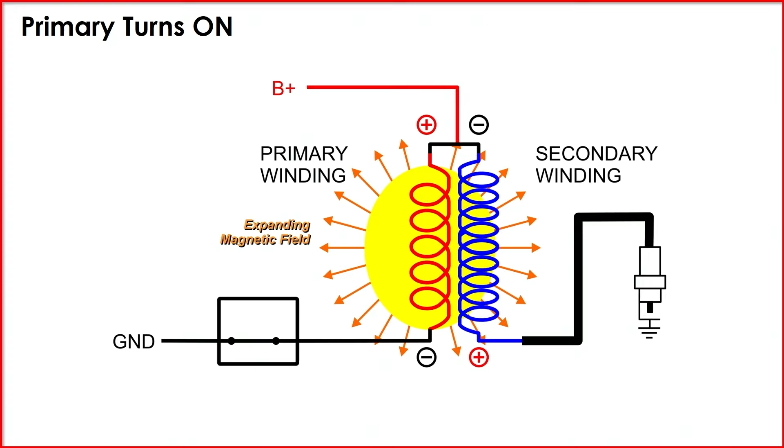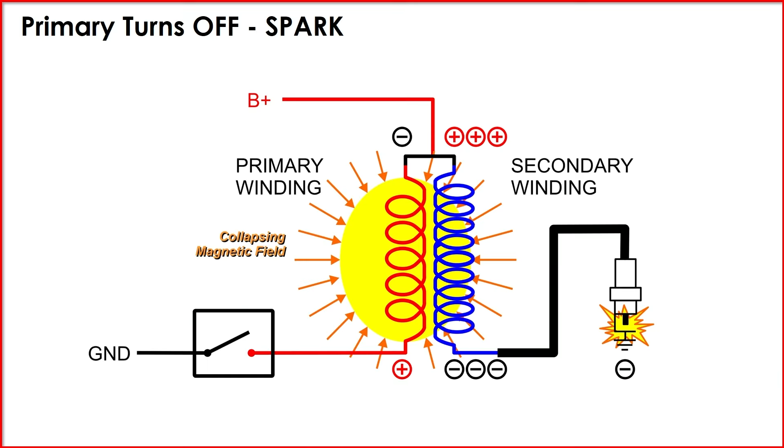First thing we're going to do is a quick review on how the ignition coil works. But whether it's a 3-wire, 2-wire, or 4-wire coil, we still have to end up at this place, where we take the primary winding, energize it with power and ground, turn it off, and then collapse that primary into the secondary and get spark to the spark plug itself. And then we repeat that cycle.

In order for the ignition event to occur correctly, there are some basic timing controls being done in crank mode to get the car started. As you can see, the big ones here are RPM and cam position, but you also see that we have labeled the MAP sensor as an input. We all know that some cars don't have MAP sensors.

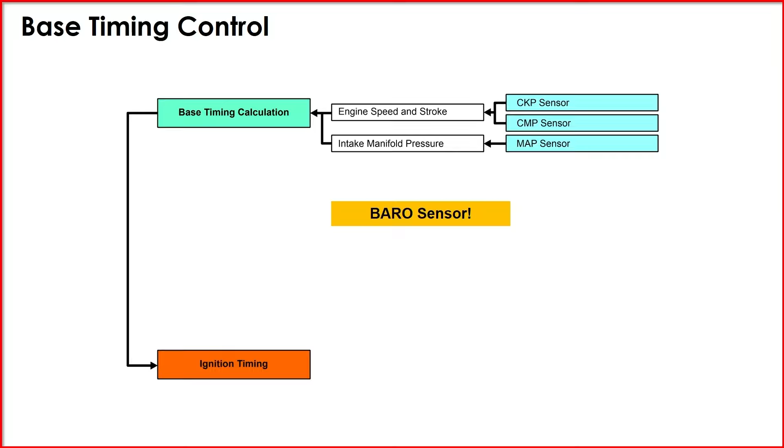This is why I've put our first power tip in there: the BARO sensor. The BARO sensor is going to be a primary input into the module that's controlling spark timing on the vehicle's engine control, and that's why I've highlighted it here—the importance of the BARO sensor. If the BARO sensor is out of calibration, it will affect ignition timing on this vehicle, or can cause erratic spark.

Once the car is running, a bunch of other inputs are going to come into place. That's when the module is going to provide additional control of the timing and move away from a basic ignition timing to an enhanced ignition timing control. That's where it has the ability to retard or advance the timing based on the conditions you see up on the screen here.

An example would be intake air, coolant temp, atmospheric pressure correction, and knock control. That's a reminder—that could also be a power tip—that we have to pay close attention to see if there's any knock correction occurring on the vehicle.

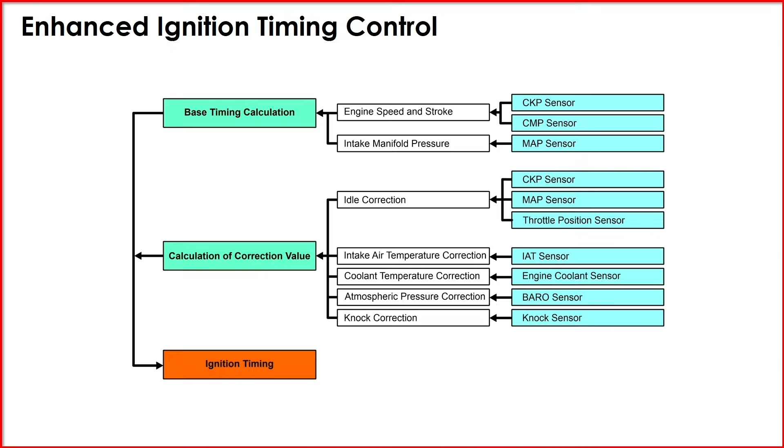And then eventually we end up at whatever desired timing the module wants it to be at. What it comes down to is they're trying to create maximum pressure, which equates to maximum power at the correct time. This is why the timing is controlled before or after top dead center, depending on the application. Most of the time we're going to be before top dead center, but the idea here is to create the maximum pressure 10 to 30 degrees after top dead center, when the piston has already started coming down, to create spark and generate that maximum pressure for maximum power.

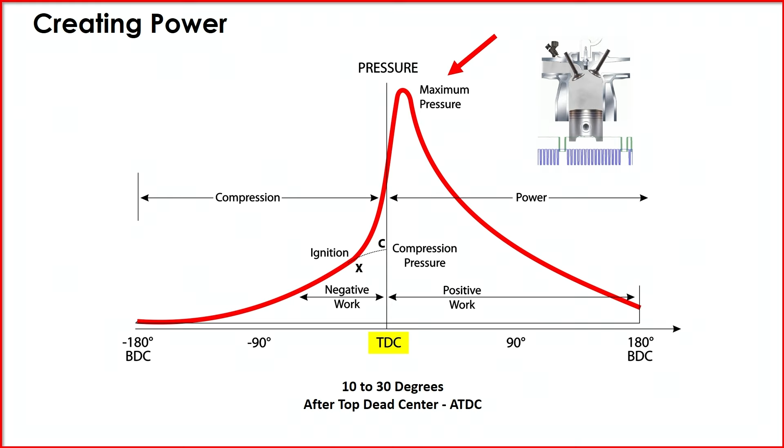And obviously that's going to turn into the rotation of the crankshaft. Why do we end up here on whether it's 2, 3, or 4-wire coils? We're concentrating our effort here today on 3 and 4-wire coils.

We have a spark check on the vehicle that is done correctly, and it fails. I'll expand on that in a second. An example of checking for spark correctly would be this ST125, which provides a load of about 25 to 28 kV in order for it to jump the gap on this tester. Some of you like to use the expandable testers where you can take it out to 35, 40 kV and look at the spark that way. What you don't want to do is use a spark plug outside the cylinder, ground the housing of that spark plug, and see if it has spark, because that's only going to take maybe 2, 3, 4 kV to jump the gap on that plug outside the cylinder.

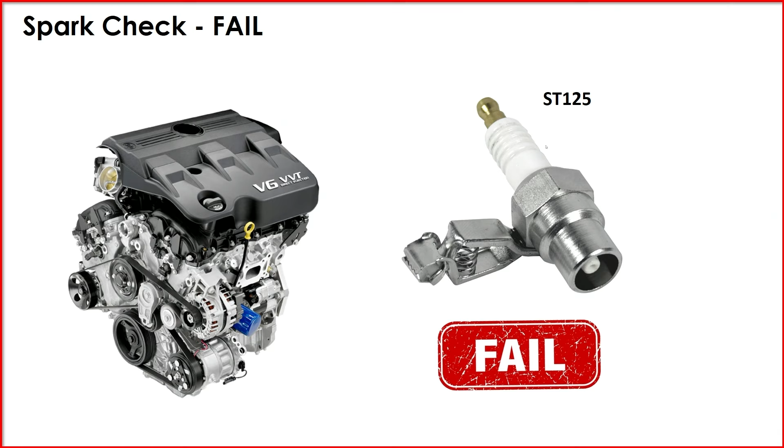So this is a typical 3-wire coil, and this is what you usually end up with. Always reference the service information, but this is very repeatable on domestic, Asian, and European cars: if it's a 3-wire coil, this is most likely what you're going to have. You'll have a power supply that we have to test, a ground supply that we have to test, and then the smaller wire, the trigger wire from the module to the coil, is where we're going to focus most of our attention with this power hour presentation.

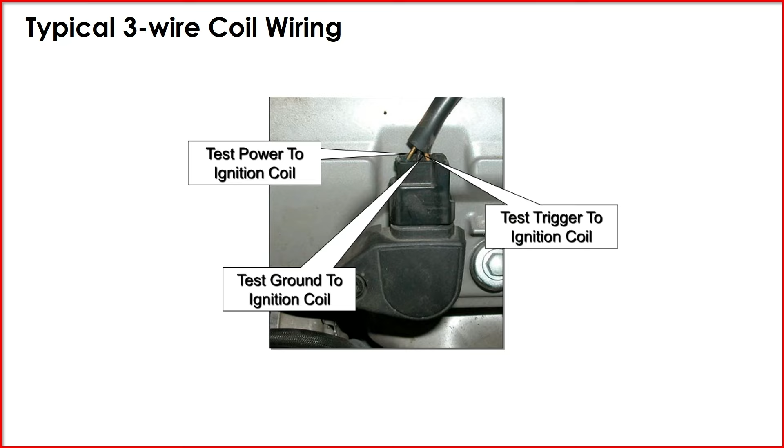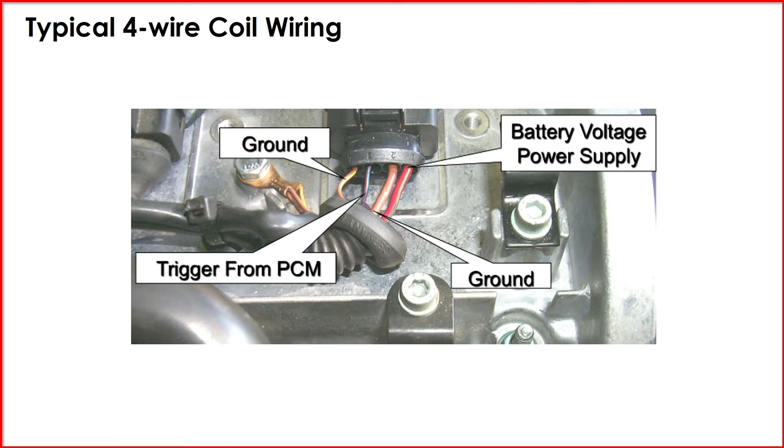I want to take you over to the bench momentarily to start IDing some of these coils. So here's an example of a 3-wire coil. Let me turn this so you can get a good look. You can see the 3 terminals on that 3-wire coil, which is what we just talked about in the picture I showed you, very conventional. This is another example over here of another 3-wire coil with the 3 terminals, which are typically going to be power, ground, and the controller trigger to the ignition coil.

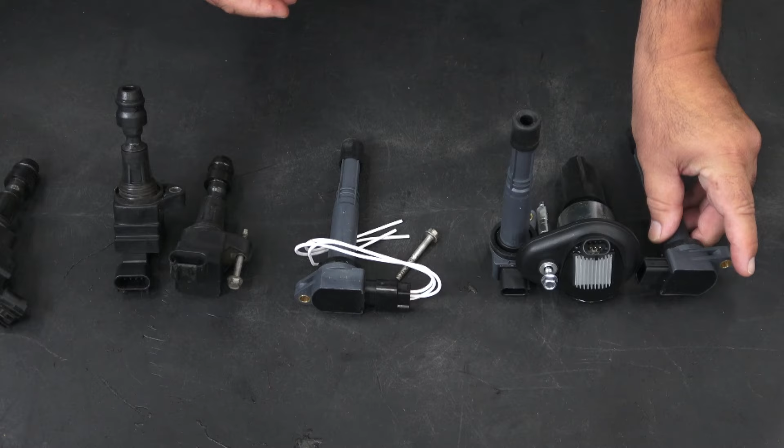Let's go back over to the presentation. What I'm going to do now is take you through a broken car, a vehicle that has a problem with a 3-wire coil. The first manufacturer we're going to talk about here is Nissan itself. If you look at the diagram, you can see that it is a typical display of what I previously showed you, with the power and ground and the control from the module.

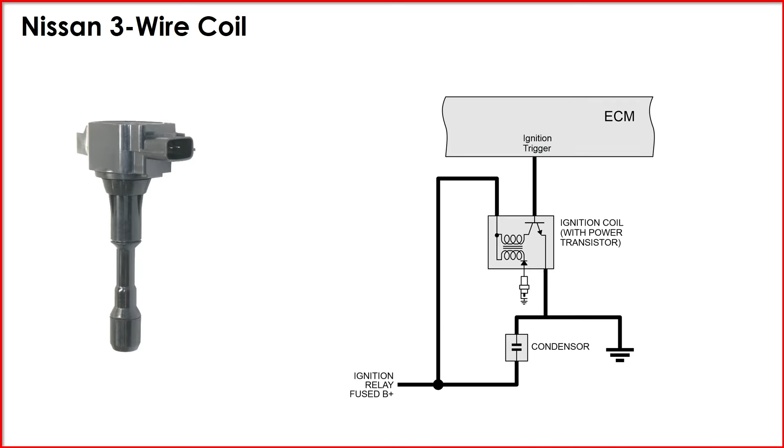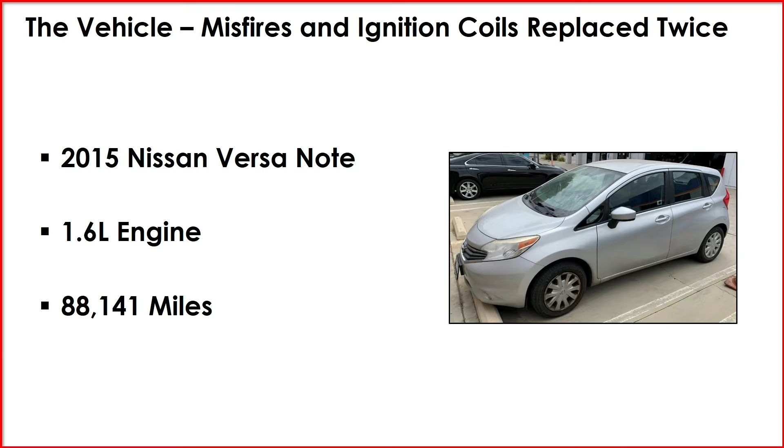The vehicle that we have has misfires, and the ignition coils have been replaced twice—all of the ignition coils have been replaced twice. This 2015 Nissan with a 1.6 has repeat coil failure, and obviously that's one of our objectives here: how do we avoid that from happening? In typical Nissan Infiniti fashion, we have a P0300 code, multiple cylinder misfire on the vehicle. Nissans are not the best at IDing the actual cylinder, either with the code or with scan data.

An example here, which many of you have joined us in our Mode 6 classes before: in this example we're using Mode 6 to hopefully narrow down what cylinder is causing the problem. Even though this is not the complete picture and we don't put all our eggs in this basket, Mode 6 is indicating that right now the most problem child appears to be cylinder number 3.

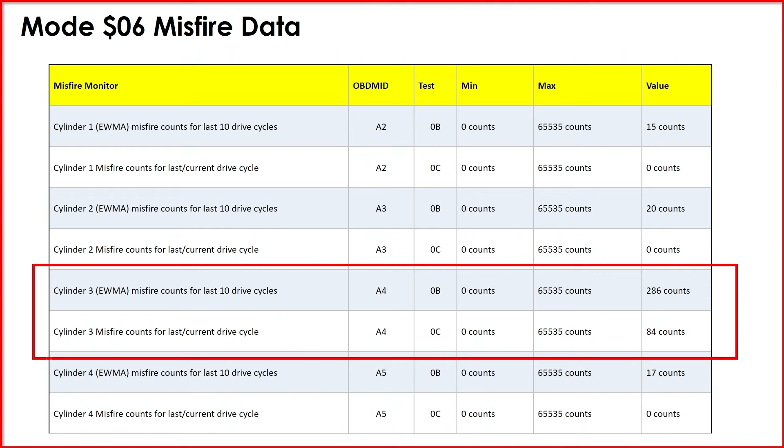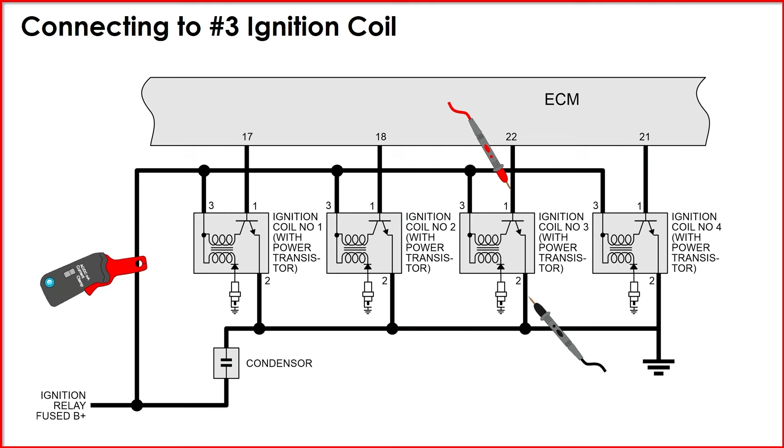We start our diagnostic testing with a lab scope, and we're going to look at amperage for all 4 ignition coils. Because Mode 6 ID'd a potential problem more significant in cylinder 3 than the others, we're going to attach the voltage leads of our lab scope to coil number 3. We have our ground connection directly to the ground that goes to the ignition coil, and then the trigger on the other lead from the ECM to the ignition coil itself.

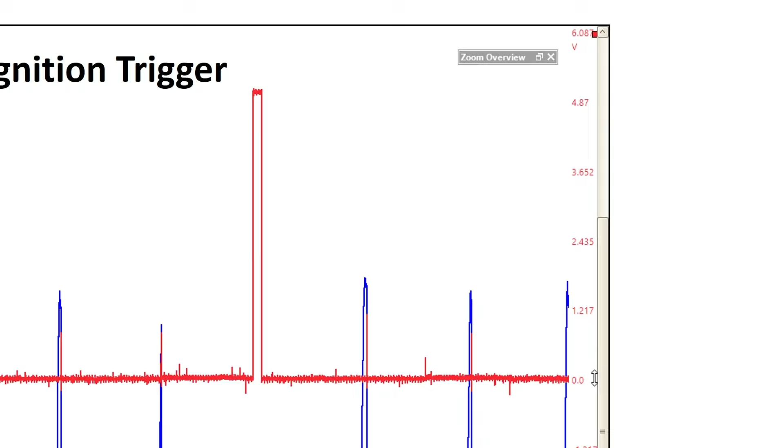As soon as we look at this pattern, we can see that the trigger is there. As we progress, we'll discuss this a little bit more, but for now I want to focus in, and I'm going to do a little zoom here. I want you to notice the approximate voltage on that trigger circuit is about 5 volts on the turn-on from the ECM to coil number 3.

It will not always be the same level for the trigger circuit on all manufacturers. We have to have an understanding that they're not all the same. For this example, we're at about 5 volts.

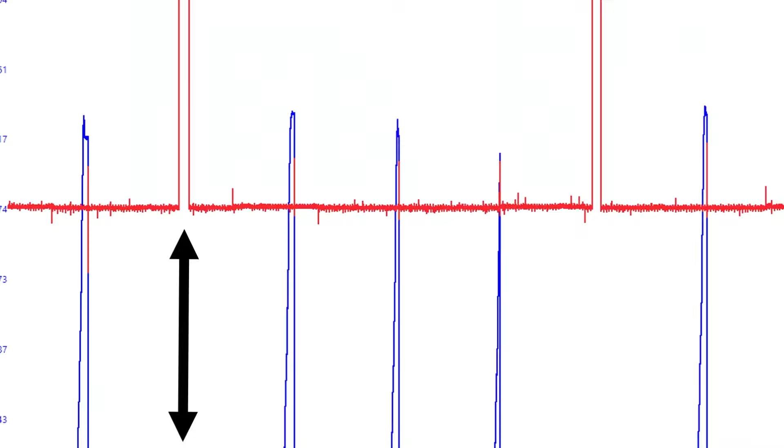Right away, we can see by looking at the amperage of all 4 coils that the trigger is there, but there is no current flow through coil number 3. Even though we're not showing the triggering events for the other coils, we can see that the other coils are flowing current, and the amperage on these is going up to approximately, let me zoom in here, maybe about 11 or 12 amps on the coil.

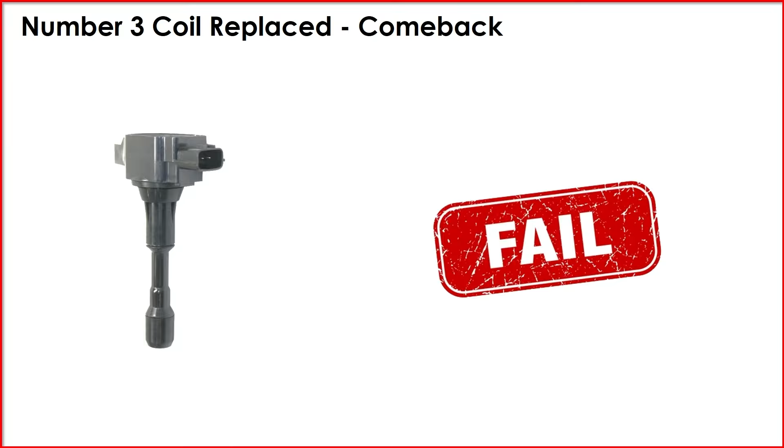So the decision is made, let's put number 3 coil in on this car. And after a while, it's unpredictable, the time frame here. May take a couple days, may take a week, but the repeat failure occurs again.

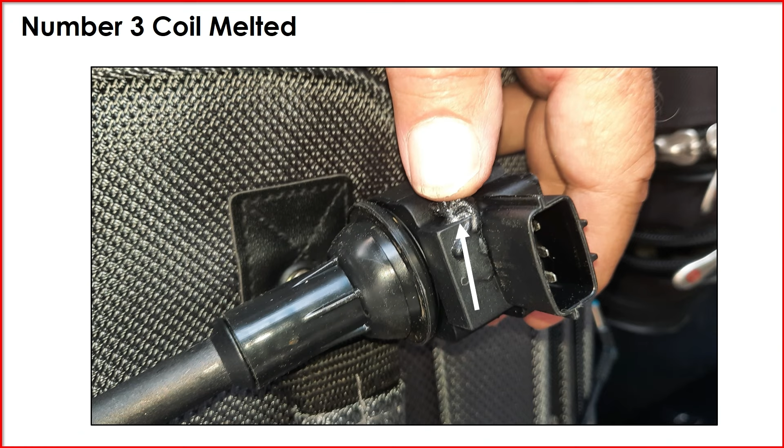Which brings us to our second power tip in this power hour: this coil is showing signs of the actual molded plastic housing being melted. So when we see this event occurring on ignition coils, which is obviously not isolated to just Nissans, we've seen this on other manufacturers too, we start thinking, what could be the problem with these ignition coils?

Could it be bad grounds? We put that at the top of the list because many of you are aware that bad grounds are the number one cause of this. But we do have some other possibilities. High secondary resistance, the coil has to work twice as hard as it normally would as far as outputting kV, voltage. We could also have a driver inside the PCM that is holding that coil turned on for an improper, extended period of time. The ones that are unlikely but have to be at least mentioned are the fuel mixtures themselves, especially specific to that cylinder if I've got a weak injector, or anything that can cause that coil to work harder.

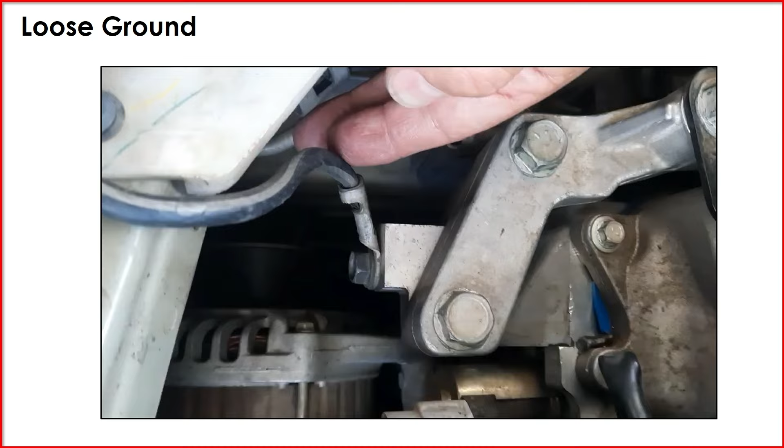This one happens to be a loose ground by the alternator housing. That ground is loose, you can grab it with your hand and move it, it's not tight. Once that ground is tightened up, 4 new coils are put in, because now those 3 coils plus the new one have failed a third time, and these other coils are unpredictable as to how long they're going to last, even though they've been changed a couple times.

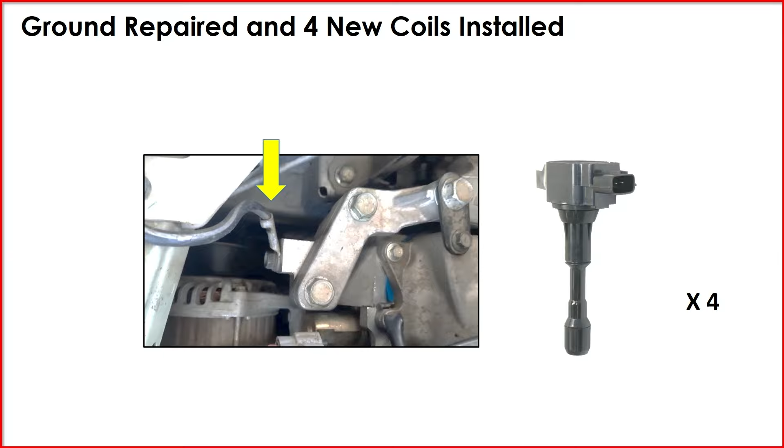If we take a look at the Ford 3-wire coil, it is very conventional as far as the amount of power and ground that's going to be supplied to that coil. It's what we're very used to on other ignition coils. And then you have the trigger circuit coming from the module to the coil.

Ford 3-wire coils are not brand new, but they are newer compared to how long they used the 2-wire coils. They also, when the 3-wire coil showed up, started using index spark plugs. Let me rephrase that a bit better: it doesn't mean that if it has a 3-wire coil on a Ford, it automatically has index spark plugs. They didn't start using them until about 2021, 2022, right in that time frame. So it's been a few years they've been using them.

But it does have to be mentioned here as a little power tip, make sure that if this vehicle, a Ford, and other manufacturers do index spark plugs also, but on a Ford, if it's supposed to have index spark plugs, that we put index spark plugs in there. We're trying to avoid some type of additional failure, a repeat, a comeback, or a drivability problem that can be very difficult to diagnose. You could end up with something like a straight misfire, or some type of misfire only under heavy load while driving the vehicle down the road.

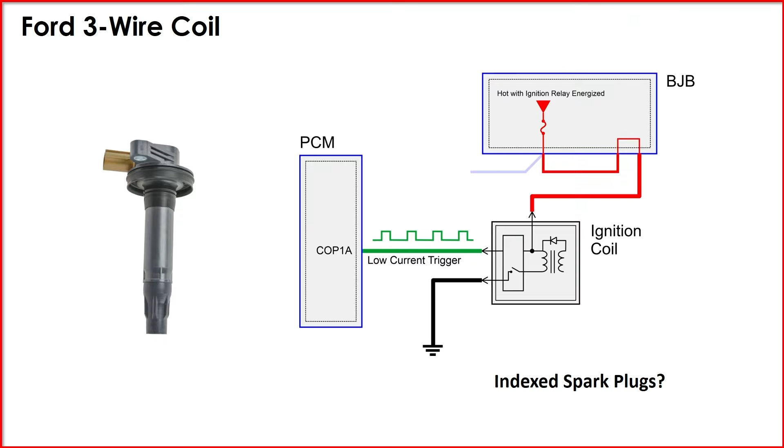To take a look at how this coil is triggered, to expand on that, we can see that we are using a secondary paddle. Let me take you over to the bench here for a second. So we're using the PicoScope to do the analysis on this vehicle, and this is the secondary paddle being used with the PicoScope simultaneously to look at the pattern we're looking at right now. So we're looking at amperage, we're looking at the secondary through a paddle, and we're using the PicoScope to look at the trigger circuit at the same time.

Let's go back. First of all, what I want to start with is going from the bottom up. That is the secondary kV using that paddle.

This gives us an indication that there is a secondary event occurring. If I move up, you can see that the secondary event is also matched to the trigger on this car. So going from left to right on the second line, you can see the trigger circuit from the PCM to the coil. If you look closely, it's happening twice. This is what Ford and other manufacturers have done, but Ford is probably the most recognized one, using a multi-strike event on this vehicle. On the first trigger, you can see the voltage is expanded there for a little longer period of time. It's turned off and then turned back on.

This appears to be slow motion, but it's happening very quickly. The piston is coming up on the compression stroke. We're trying to dial in the ignition timing perfectly on this vehicle, and they're using multi-strike to do that. Other manufacturers do that too. My point here is that if you're a scope user, many of you have been exposed to this throughout the years. If you see this event and it's not what you normally see on other vehicles as far as multi-strike is concerned, it is a normal occurrence.

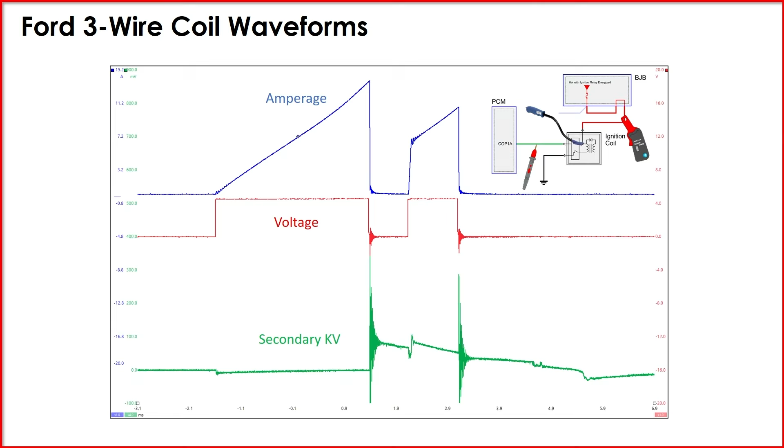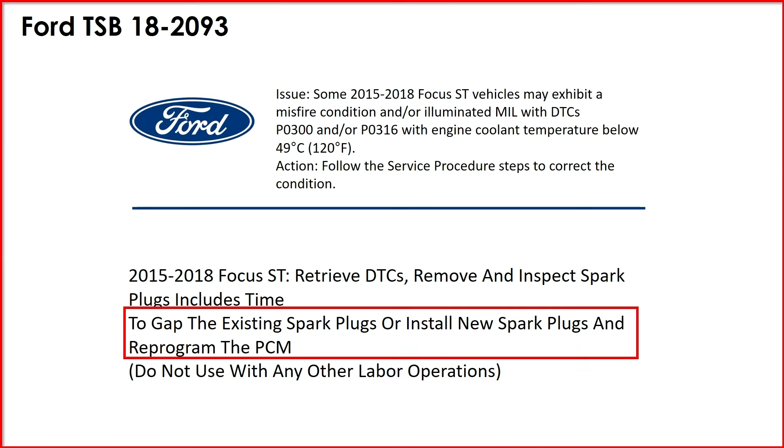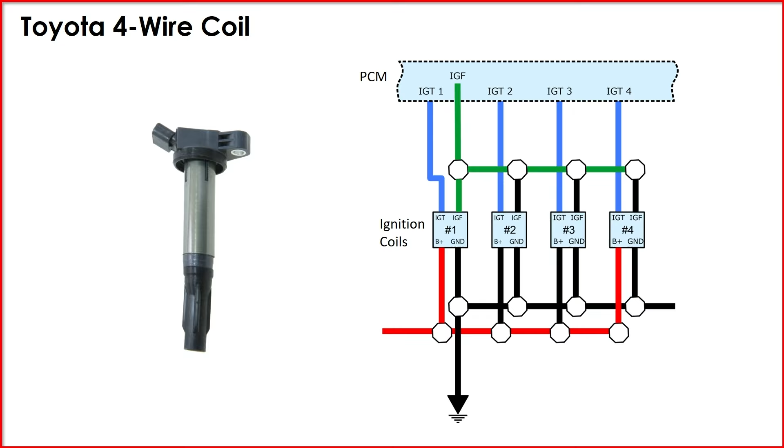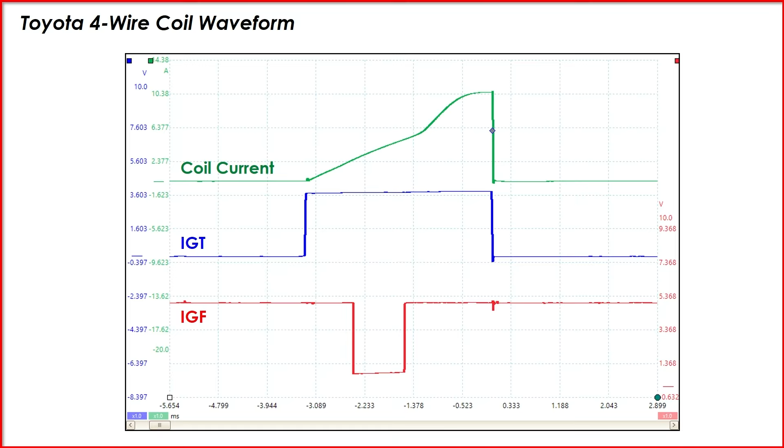What's happening here is that once the coil current gets to about 2 to 3 amps, that's when the IGF will pull the 5 volt line from 5 volts to 0. That's why you see the delay between the trigger and the IGF going from 5 to 0.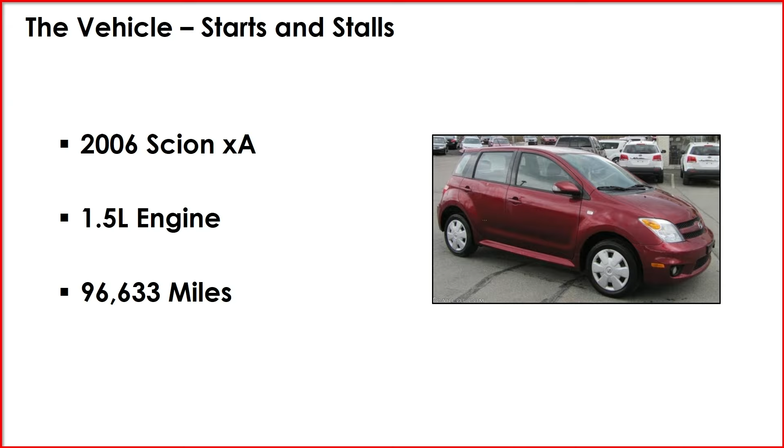Let's apply this information to a broken car. We have this 06 Scion with a 1.5. The condition on the vehicle is it starts, runs for a couple seconds, and stalls out. We hook up a scan tool, and we have P0351 coil A primary, 352 coil B, and 354 coil D. So we got basically electrical codes for 3 out of the 4 coils.

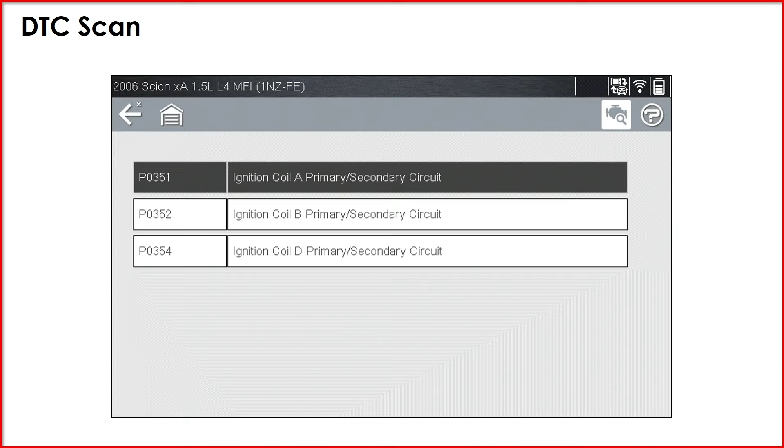For the connection, we're going to check amperage to all 4 coils simultaneously. Now we're going to look at IGT for coil number 1, and the IGF circuit, which is common to all 4. You can see we're using the ground circuit that's being provided to the coil for our lab scope connection.

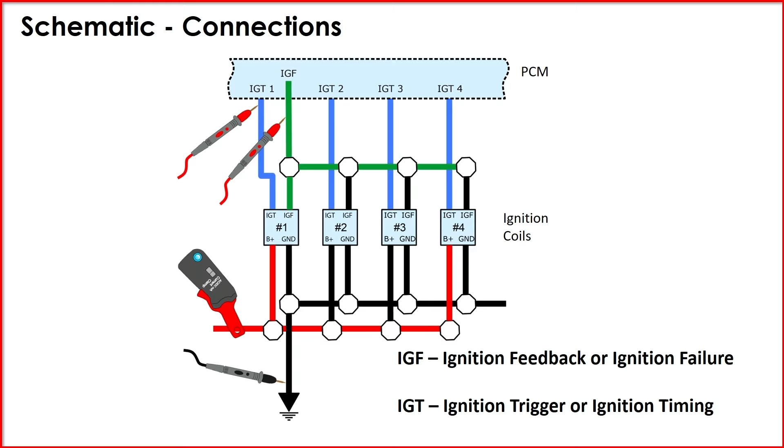A little terminology here. That IGF has been called basically 2 things since the beginning of time. It's either called ignition feedback or ignition failure, depending on what literature, diagram, or flow chart you're looking at. And IGT has been called ignition trigger or ignition timing. The official terminology is really ignition failure and ignition timing, but it's been called feedback and trigger forever out in the field. Either way, it's the same circuit.

Let's see what we have on this one. We're looking at the trigger for number 1. So we do have a trigger, the top line for number 1. If you look at the voltage on that one, it's about 4 volts on the trigger circuit. So we do have trigger to number 1 coil. The reason we're here, one of the codes was for coil number 1. We just picked number 1 to start with here.

We also have current flow for number 1. All you gotta do is follow it straight down, and you can see it lines up with coil number 1. We're getting current flow on this one at about approximately 11 amps. We also have an IGF for number 1, and you can see the delay there on the IGF for number 1.

What is not good here is that we have the IGF stuck low at 0 volts when it should be going up and down. It should be starting at 5 volts and then dropping down to 0 as we trigger these coils here. And if you look, the other coils are being turned on and off. We don't see the IGT because we're only looking at IGT for number 1, but the IGF being at 0 volts when it's not supposed to be, that is the problem child.

That's why we're getting all those codes. The IGF is the feedback to the module to let it know, hey, you sent out a trigger, and now I'm sending the signal back to you that this coil has been triggered. In this example here, it is stuck, most of the time stuck at 0 volts.

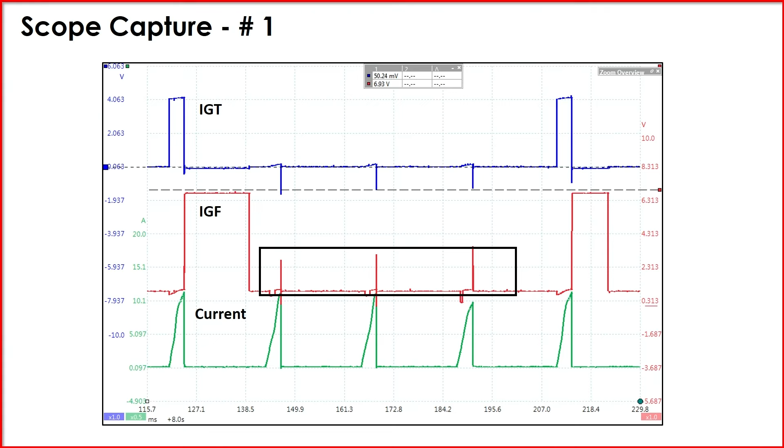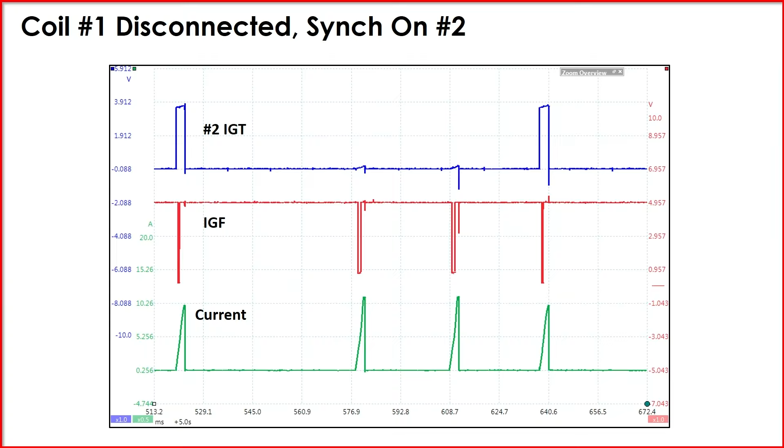We disconnect coil number 1, unplug it. We now go to coil number 2 and start triggering off of coil number 2. And now we have a normal IGF circuit where it's at 5 volts and only dropping to 0 volts when each coil is getting turned on and off. Obviously, number 1 is out of the loop right now, but 2, 3, and 4 are in the loop, and now we have a normal IGF circuit.

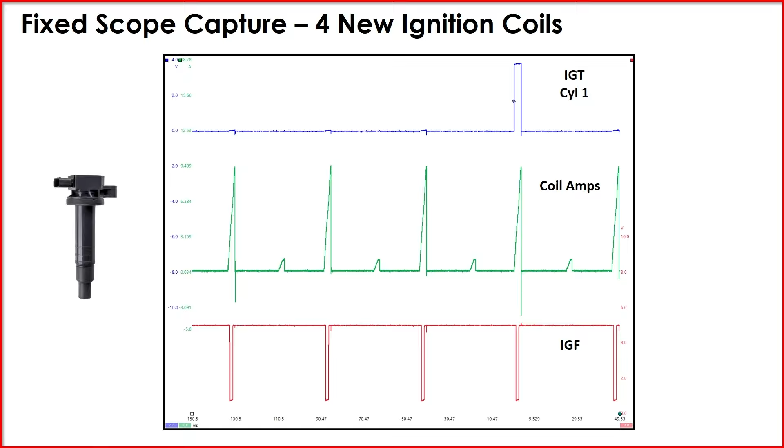With 4 new coils in there, we now have conventional IGF, coil current, and IGT, where now the IGF circuit is at 5 volts, and the only time it drops down to 0 is when an ignition coil gets triggered, and when that coil reaches a certain amount of amperage, the 5 volts gets pulled to 0. The small events that you see in between the ignition coils just happen to be the power supply to the injectors, and that's why you're seeing them on our pattern.

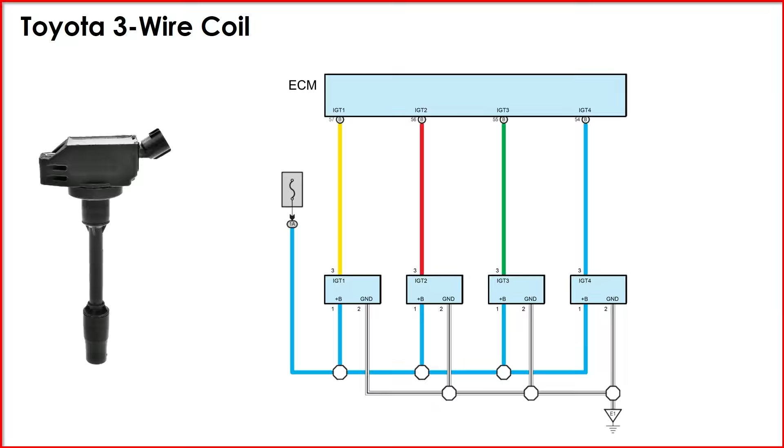Somewhere along the line, Toyota went to 3-wire coils. They have a few years here also, so now they have joined kind of the rest of the world here in conventional operation. They got rid of the IGF, and now they have power, ground, and IGT. That is as conventional as it gets, where you have the IGT and you got the typical coil current.

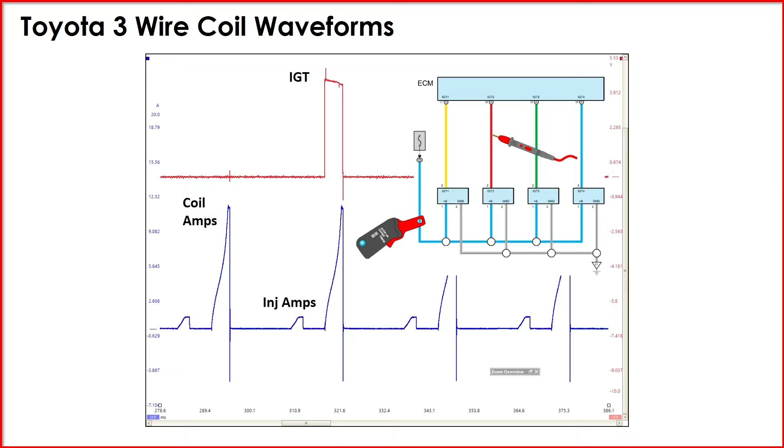We move on over to the GM 4-wire coil. We get an opportunity to talk about 4-wire coils.

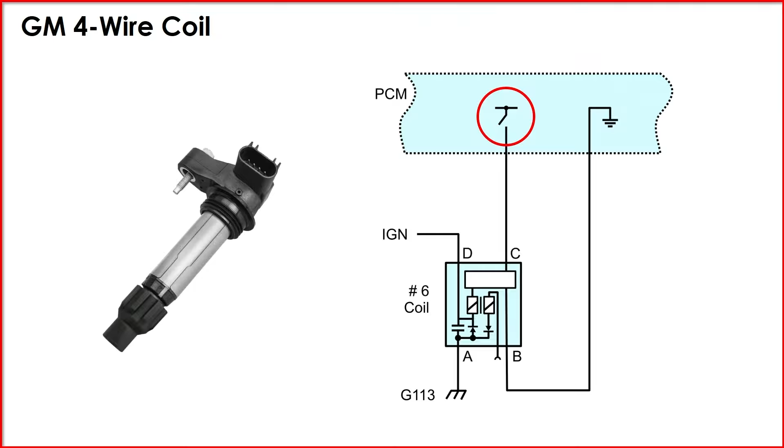If you look at this one here, we have power, we have a power ground, G113, and we also have what they call an ignition ground coming from the module. It can be comparable to a sensor ground. When we're talking about coolant sensor, map sensors, we have a sensor ground coming from the module itself. The reason they do that is to reference the trigger circuit off a ground from the module. It's basically for the trigger circuit itself.

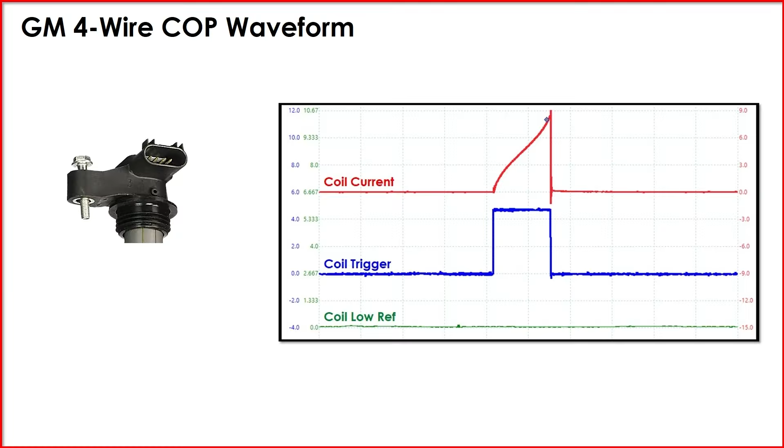If we look at the amperage and the trigger, pretty conventional, where the amperage is going up to about 9 amps, and the trigger circuit is running a little bit over 4 volts, about maybe 4.2, 4.3. But outside the conventional power and ground, this is the trigger circuit to the ignition coil. So you can see it follows suit of the other ones.

We look at this 2012 Impala 3.6. It basically has a no spark condition. We pull up the wiring diagram like we're supposed to.

Now we're going to do something a little differently here, because now we're going to use 2 channels of the lab scope. One channel, A, is connected to the power and ground supply. And then channel B is connected to the control side from the module, and the ignition ground, or sometimes typically a lot of GMs will call it the low reference ground, from the module to the ignition coil. So there are 2 measurements that are being done here.

If you look at the pattern up on the screen, the channel B, the top one, is the trigger. And we're running here 2 volts per division, so we're pretty much hitting 5 volts there.

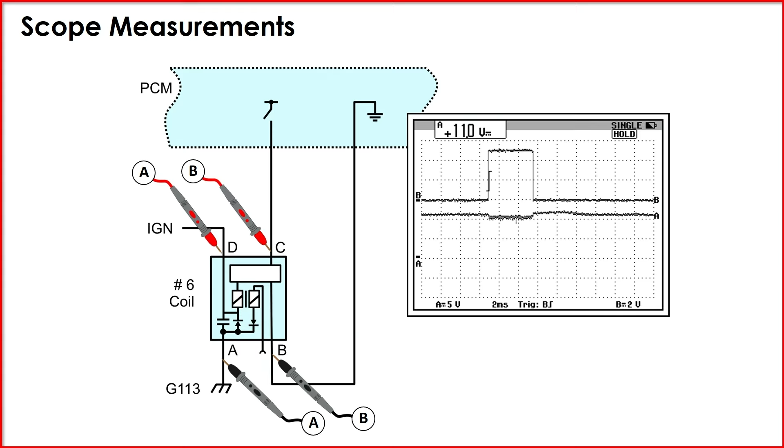At the same time, we're looking to see, hey, is my power and ground supply, which we haven't mentioned up till now, but it applies to everything that we discuss here, good to this ignition coil? We're using a scope, we're letting it run, we're letting it trigger, and we're looking to see if the power and ground is good. That's what you see on channel A. We're referencing G113 as our ground, and we're looking at the power supply going to it. Nothing really stands out here as far as the power and ground is concerned to the ignition coil.

But many times, right, we take shortcuts to see if we can resolve a problem quicker than maybe spending a bunch of time diagnosing on it.

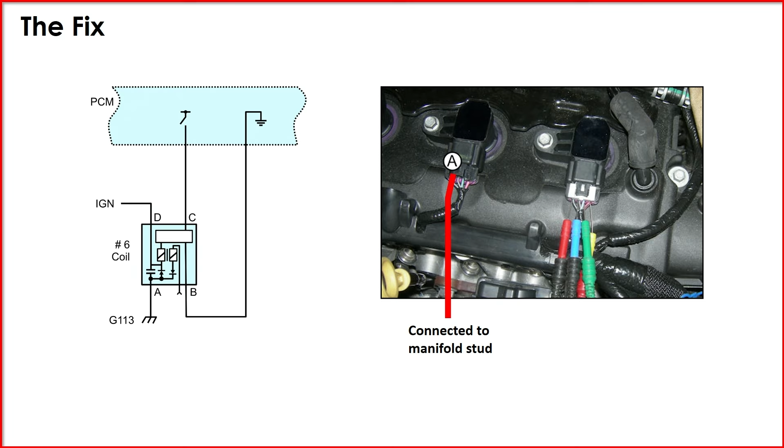Putting an additional ground to G113, because G113 is the common ground for the coils, and all we're doing here is saying, you know what, we have seen this ground circuit cause a problem in the past, it's G113. Hey, why don't we just put a ground from a stud right to one of the coils and see if we fix the vehicle, and that takes care of the problem. So there's nothing wrong with it, it's a power ground, chassis ground, supplying ground to it to see if it eliminates a problem. Some past experience kicks in here that, hey, this G113, we have seen problems in the past causing multiple issues, and this is one of them here. So there's nothing wrong with it, and that's what fixes this vehicle.

We end up going to G113, and we find a bad ground connection there and repair that.

As a review, before I take you back over to the bench to take a look at some of these coils again, for these ignition coils, on a typical control circuit on the left-hand side of your screen, the amplitude on that one, which I got highlighted here, is 4 volts. A typical control circuit, what you see on the right side, is about 5 volts.

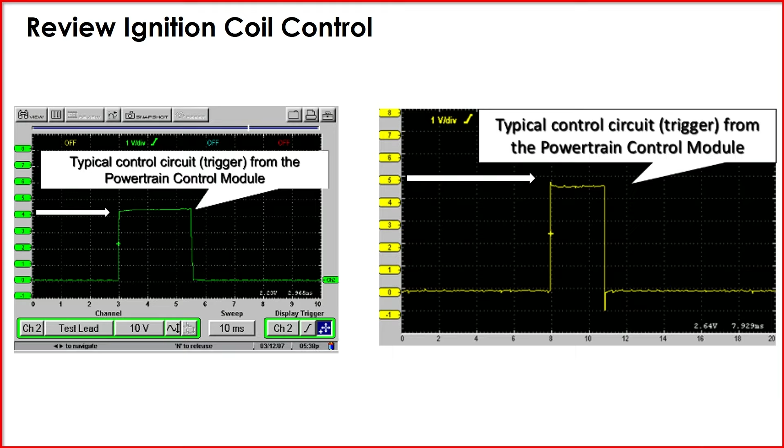And it could be, as you saw here, some of our examples where we run from down to about 3.5 volts all the way up to 5 volts. And that has to do usually with the coil itself. Many times the control circuit or the trigger circuit, no matter what terminology they're going by, will typically open circuit go up to 5 volts. Cautious with that, but that's what's typical. What usually causes the amplitude to go lower, which is nothing wrong with it, unless it's abnormally low or not getting pulled down at all, is the ignition coil design itself.

Before I take you over to the bench itself, I want to talk about the additional resources, and then I'll take you over to the bench.

There is our YouTube channel, standardbrand.com. On that YouTube channel, there are some very straight to the point, procedural, how to take something apart and put it back together, or diagnostics. Hey, this is what's wrong with the car, and this is the quick, short diagnostics to get to the problem. So this is a lot of technical references, our YouTube channel.

If you go to standardbrand.com, you get an opportunity to also see some background or information on ignition coils. When you get an opportunity, go there. There is some technical background information on all our ignition coils at standardbrand.com.

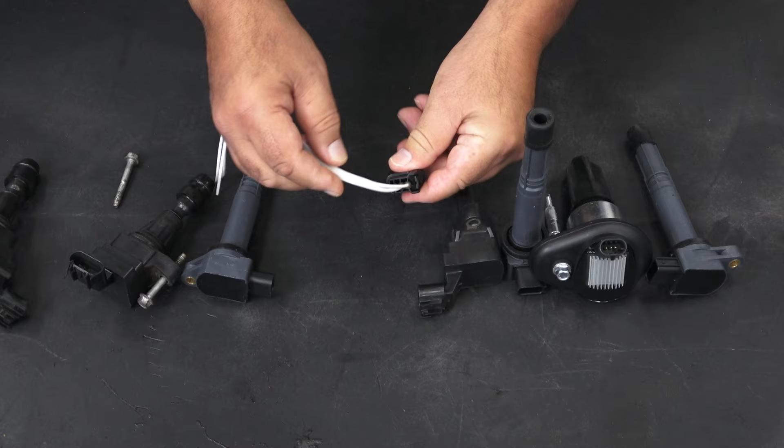Before we close out, let me take you over to the bench for one additional power tip. When you are going to change these ignition coils, please inspect thoroughly the connector and the wiring to the ignition coils. Some manufacturers are prone to failure of the connectors where the back side starts to back out, or the front side, we lose terminal tension on the front side that connects to the ignition coil. So make sure to inspect these coils thoroughly and to inspect the connectors themselves for any damage that's going to cause additional failures down the road.

And remember, even though we provided you a lot of information in a short period of time, you can always reference our two websites, the YouTube channel and standardbrand.com.